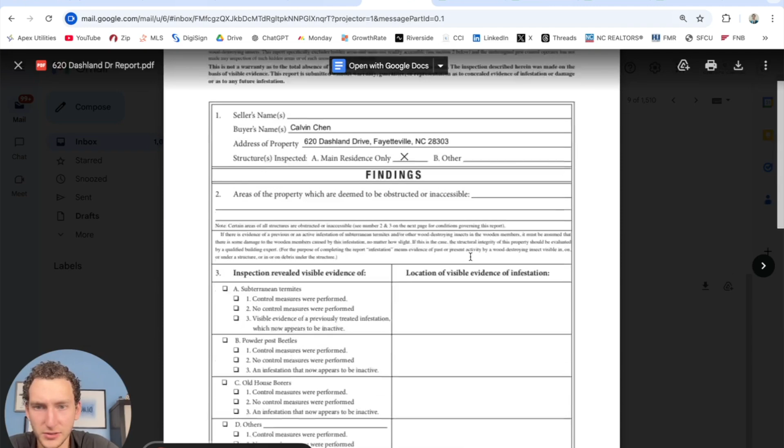Let's switch over to the inspection reports. So report ready, in Fayetteville, North Carolina area, I like to use Silk Inspections. John Fordenberg, if I'm saying the last name right, but John is great. His team, sometimes we work with Drew as well. But let's go one by one.

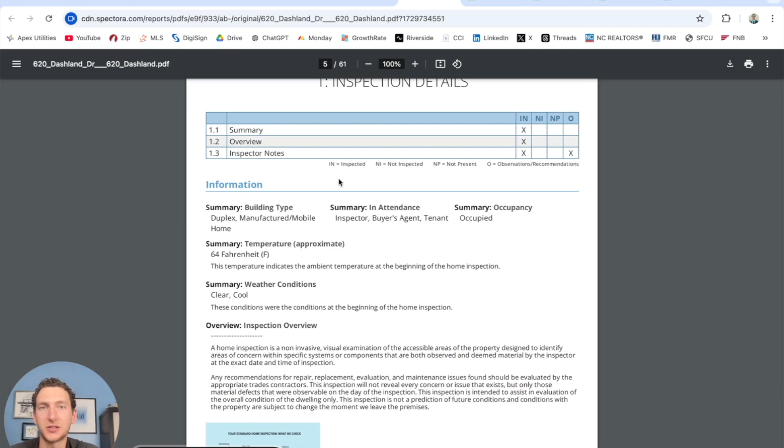So this is 620, one of the duplexes. All right, so inspectors are meant to find everything possible and inspect everything. You would hope that they would. Now, what our job is as investors, brokers, buyers, is to go through and see what's actually concerning. What do we need to get fixed? What is maybe just normal wear and tear? What is concerning and needs to be negotiable?

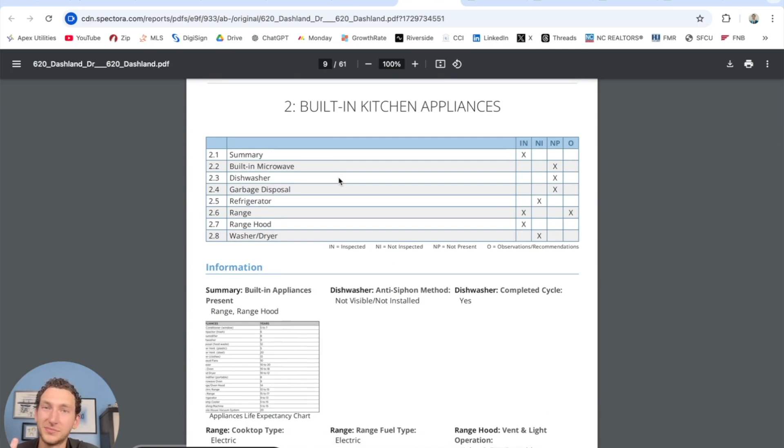So this tenant right here in Unit A wasn't home, wasn't letting anyone in. Could be for a host of reasons - at work, out of town, maybe they're moving out, maybe they're getting evicted, and the property management was just not really wanting us to know that necessarily. It's tough. That's real estate. You just got to go for it.

So let's go through here. I'll try not to talk too much. Anti-tip device, that's so this doesn't tip forward. Doesn't - I mean, it matters, but it's just a small safety hazard.

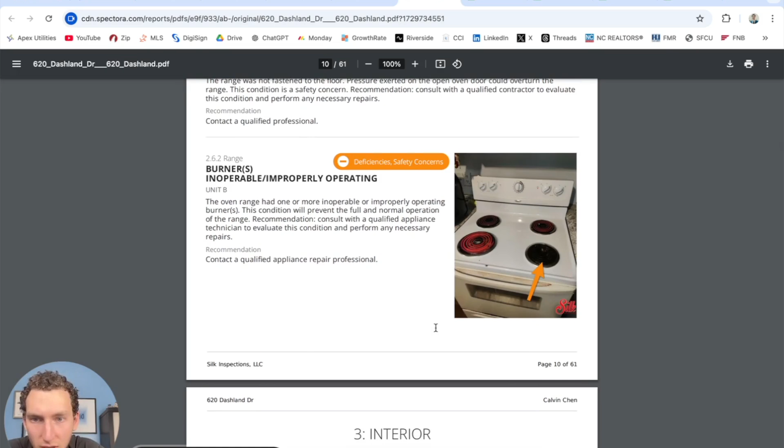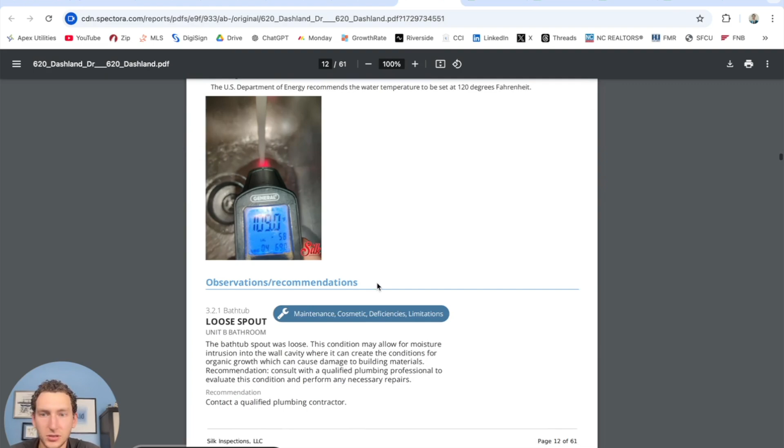So this looks like the burners are not turning on. These are very low cost repairs to make, so not a big deal necessarily. Water temperature - he had nothing on there. This spout is concerning because if it breaks off, it can cause a huge leak uncontrollably. So that'll need to get fixed for sure.

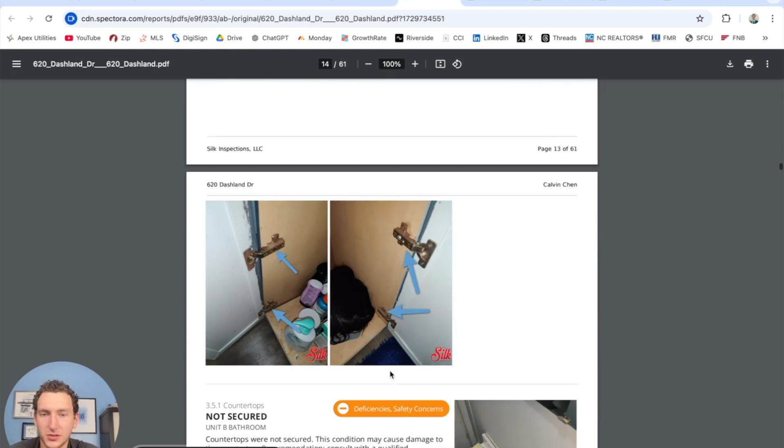Inoperable exhaust fan, we'll want that to get replaced. Cabinet hinges also, so there's no damage. The countertop needs to get secured. So these are all mostly small things so far, but certainly important.

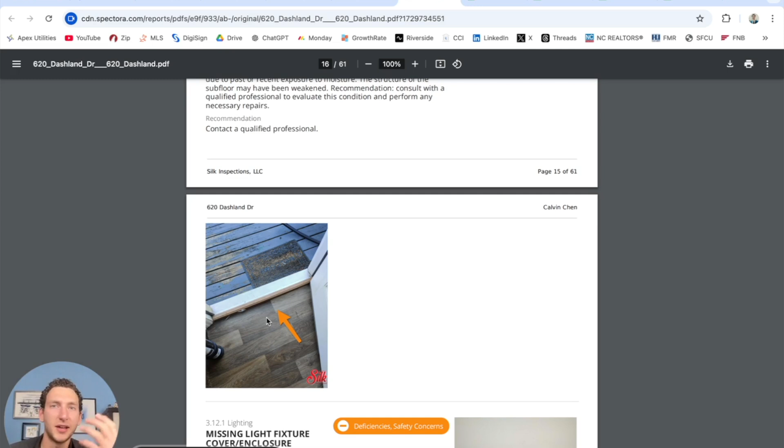Nail pops in the ceilings, loose doorknobs. And this is actually more concerning, is that there's a soft spot, and that soft spot's right by the front door. That could be - thankfully, it doesn't seem like it's from termites or anything, but it does seem as if maybe there's a bad seal at this front door and water has intruded and then softened out the bottom of the subfloor. So that's a concern for two things: need to fix a subfloor, get that soft spot fixed, and second, seal up the door properly.

When I was there, the inspector pointed out there's no gutters, so that water is just coming down, and if it doesn't have any diversion with the gutters, this type of thing is going to happen.

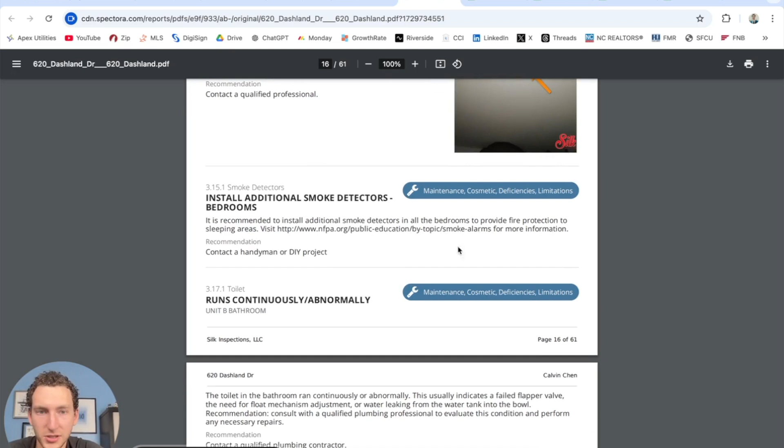I looked in this closet because I walked this unit specifically, and there's no light fixture. There was no switch either, so it was just a pull down. This isn't necessarily the hardest thing, but having it be exposed is a risk, especially as a landlord. Need to install smoke detectors, so that's important - those are required.

Toilet in the bathroom. Maybe it has a failed flapper valve. Need to fix that.

Inoperable, painted shut. I wanted to replace these windows anyway, a few of them.

If you can see the humidity here, organic growth. Yeah, I saw this one too. We don't know if that's mold or not, and the contractor can't specifically say. The inspector cannot specifically say because he's not a mold specific inspector, but he can say organic growth, and usually that means mold. I didn't like this at all to see that.

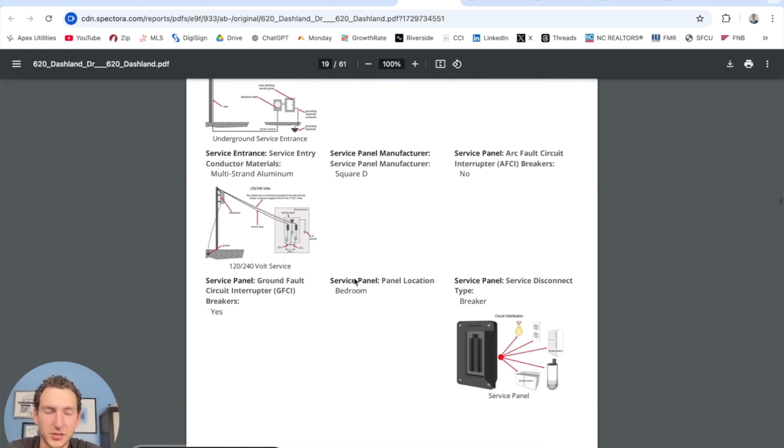It has a meter for each unit because there's unit A, unit B, as a duplex, which is good. It has GFCI protection. Good.

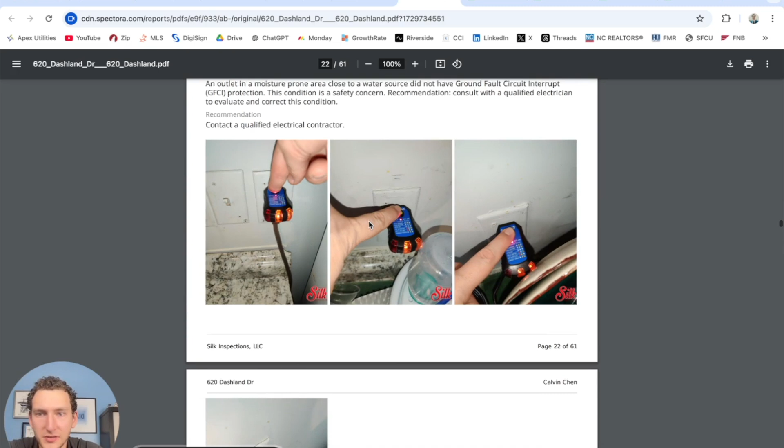Okay. The kitchen does not have GFCI protection though, so we'll need to get an electrician over there. This is not great either.

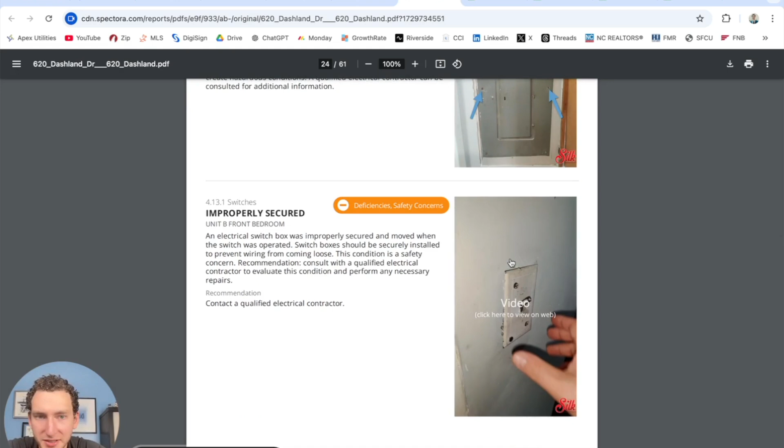So I saw these outlets and I really didn't like them. I think those should be replaced.

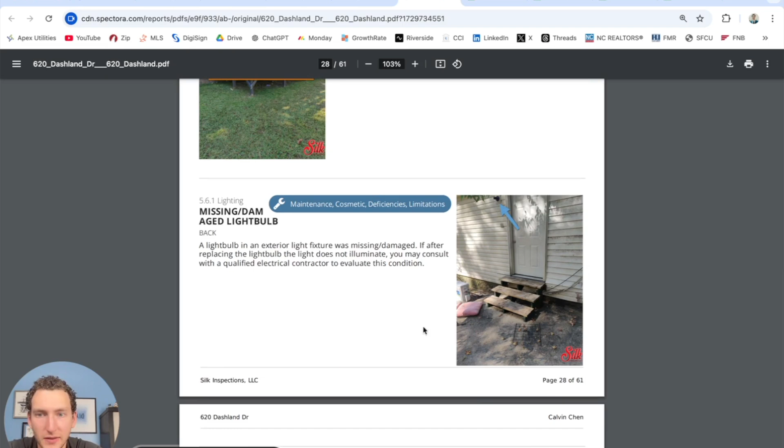Oh, this is on the deck. Yeah, don't like that deck. The back door doesn't have a light bulb. A whole bunch of things.

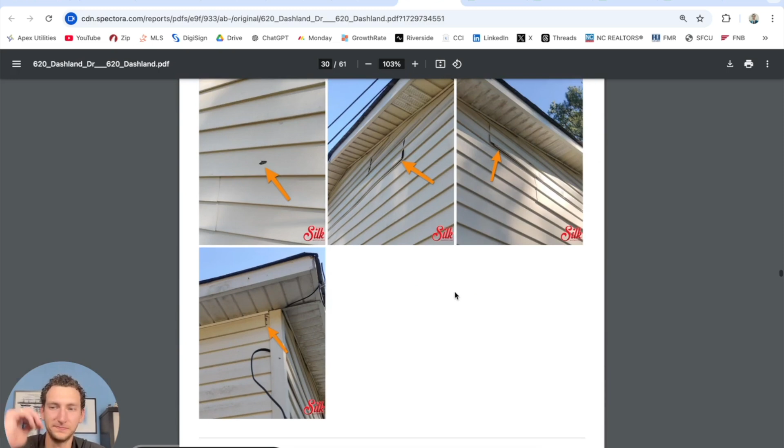Some siding damage. Yeah, a whole bunch of siding damage.

This is a tree that's pretty close. Can damage the foundation walls, so we'll want that cut down. Can also damage the roof.

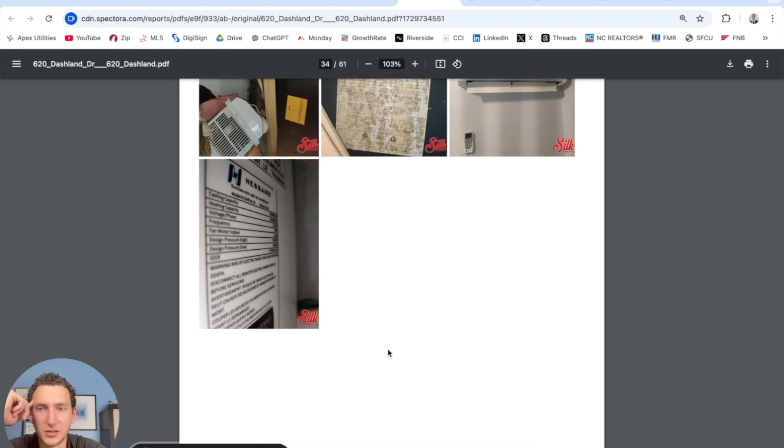Heating and cooling, let's see. All right, it's got a thermostat. Manufacturer's data plates present. So it has this mini split unit, which actually provides the heating and cooling. It doesn't have central air.

These are newer. But the central heating that was previously wired there was removed, probably because it didn't work. And to install these is about $2,500 each. Maybe even back when the owner installed them, it was less. Present day today, October 2024, it's about 2,500 to 3,000.

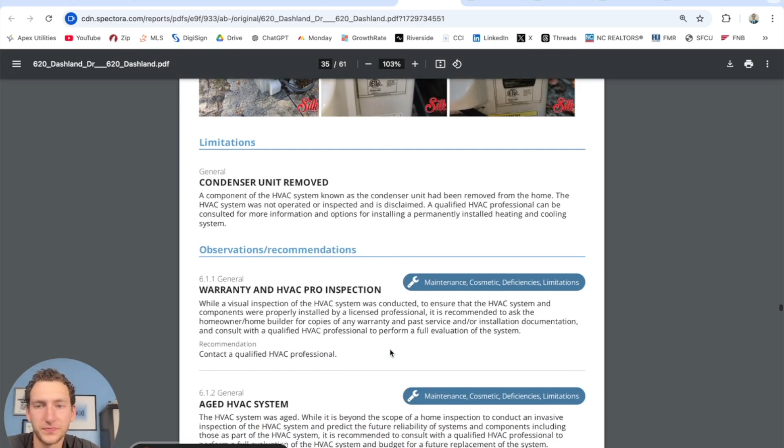And if you do a whole unit for each side of central heating, because you need one for A, one for B, you can't keep them the same, that's like minimum 7,000 each, probably more. Lack of refrigerant. This is a concern because we need heat, especially going into wintertime. That's a non-negotiable. Well, we'll negotiate it probably, but as far as providing that for the tenants, non-negotiable.

I think the roof's fine. Just has some vegetation. They always note that, and that's the tree that we saw.

Okay, no gutters. Exposed nails. No caulking.

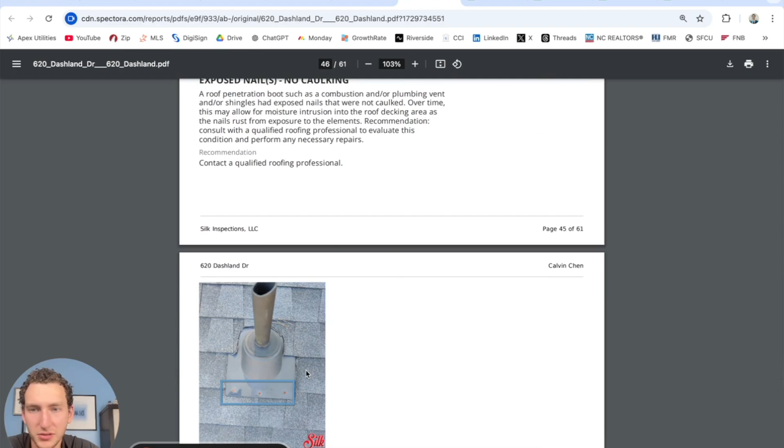Yeah, the vapor barrier is important. The dryer vent tube going straight into the crawl space, that's a no-go. It's going to cause all sorts of humidity issues.

There's some organic growth throughout due to the moisture. Staining, recent exposure to moisture. Let's see what this is.

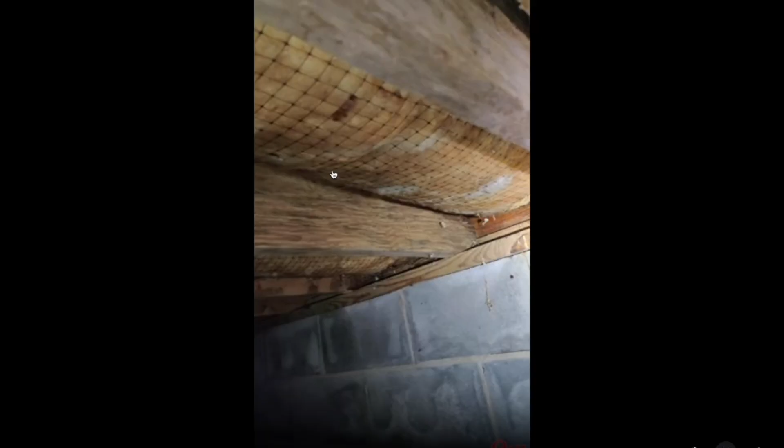Well, just seeing that, honestly, that's probably from where the outside had some missing, the fascia was open. Rain probably got in there, comes straight down the wall, and then hits this.

Conditions because it's so high in moisture. But once you put that vapor barrier, fix the fascia outside where it's exposed, those things should get fixed.

Hairline crack. Okay, the thing about this is, unless it's a quarter inch or wider, it's not necessarily the biggest issue. The tree roots causing cracks is not a surprise.

And yeah, I mean, there we are. That's exactly so. That's not fun to see. This is: take out the tree, prevent any further cracking.

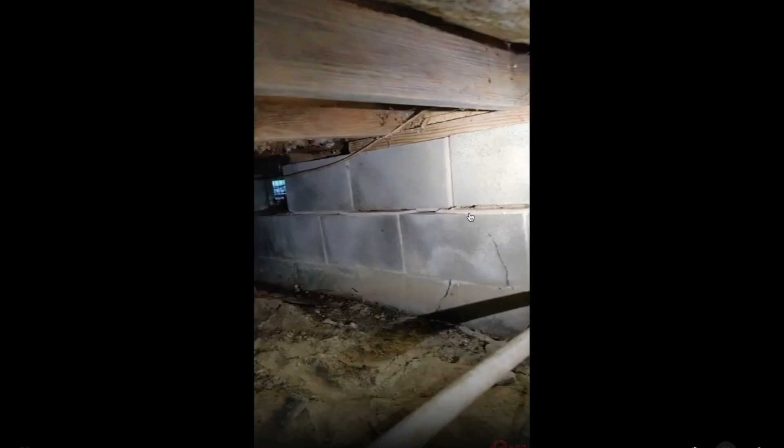Has some missing fiberglass. You know, we have to cap that because snakes can get in there, things can get in there and plug the lines. Dirt, leaves.

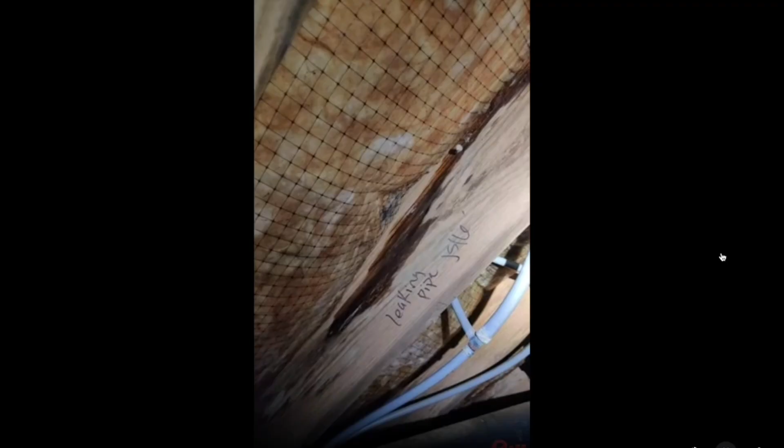This is the hot water heater, and it's closed up. Let's see this leaking water supply line.

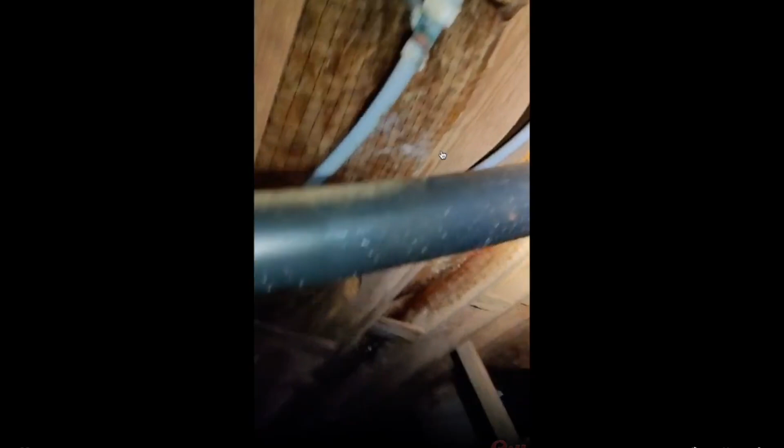It has polybutylene piping, which is not fun. This stuff was banned, I think, in 1990 and or '93, something like that. And it's because over time it breaks down.

So this is the inspector under the crawl space. Yeah, polybutylene, it's crap. Sometimes it'll last a long time, sometimes it gives out. But that was 620.

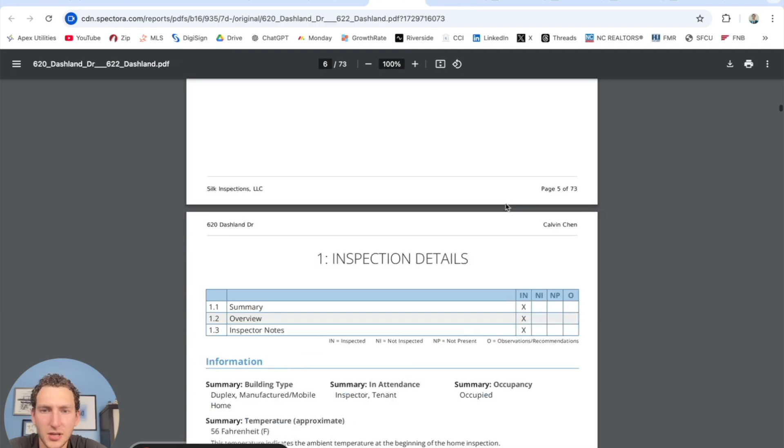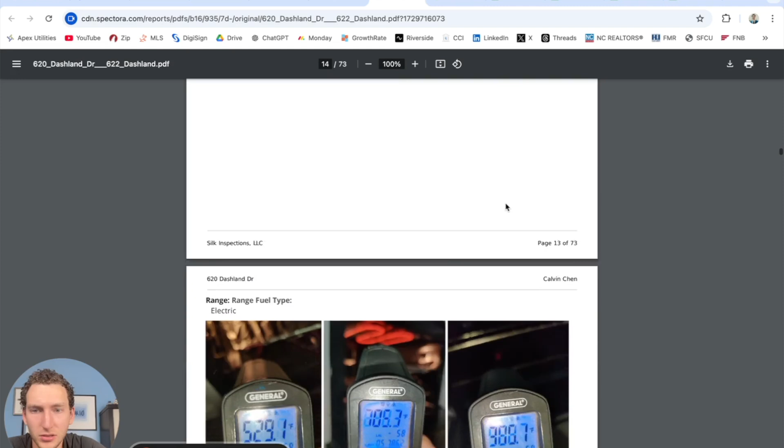Let's go over to 622, and we'll see how much... nothing is so concerning right now so far. I think all of these things are easy fixes and not too costly. There's certainly things we can take to the sellers and negotiate with. Unless they're not willing to negotiate, it might be worth backing out, but so far I don't think it's worth it to back out. I'll go a little quicker on this one.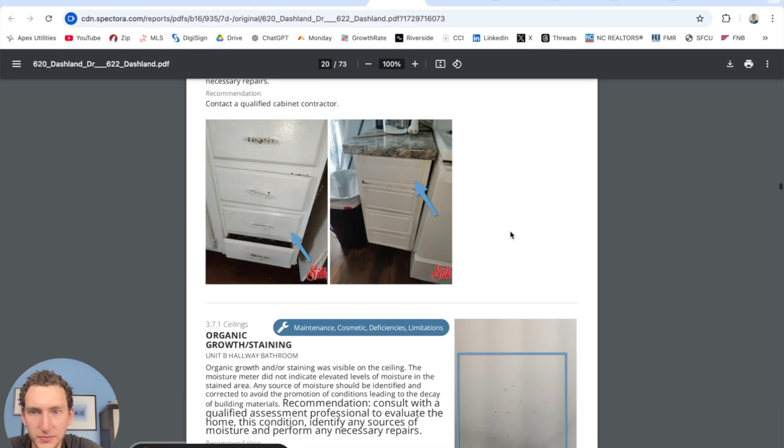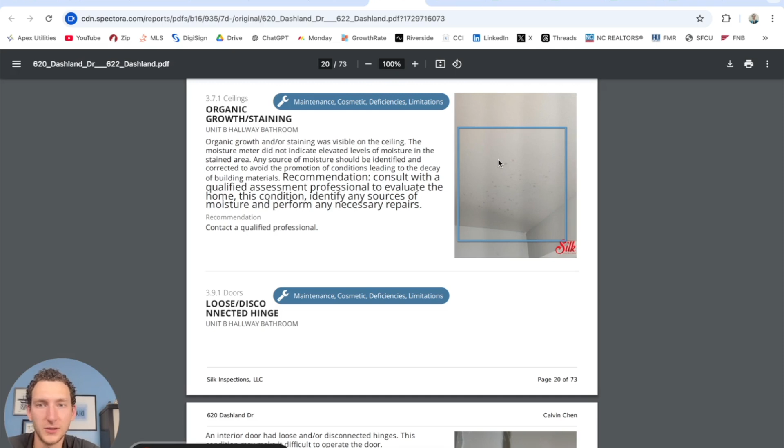The bathroom tub, okay, no exhaust fan for the shower. That can be installed. This one can be replaced, these drawers. Okay, I don't like this, but that can also be dealt with. This is potential mold spores, organic growth staining. So what we could do here is spray Kilz, which is a primer that also kills some mold spores, and paint over it, as long as we have the moisture problem taken care of. Otherwise, the moisture problem is something that will make that continue - that's the root of the problem.

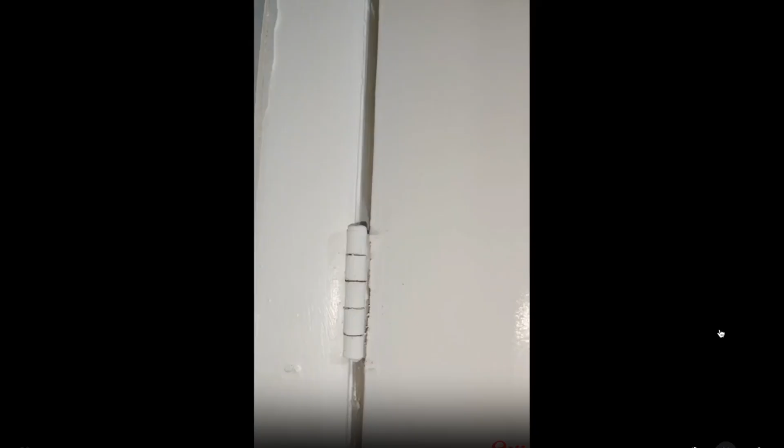Let's see, this one is, of course, we go back here. All right, here's the video we were trying to watch. Oof, okay, glad you found this.

It's a little sticky because the hinge is loose, but we can fix that hinge. Doors, more gaps, uneven sloping floors - that's a concern.

What is that? Floor covering material - hardwood laminate installed in a moisture prone area. Well, sometimes these are waterproof. I put these in my wet areas, kitchen and bathrooms, because they click in and they can be waterproof.

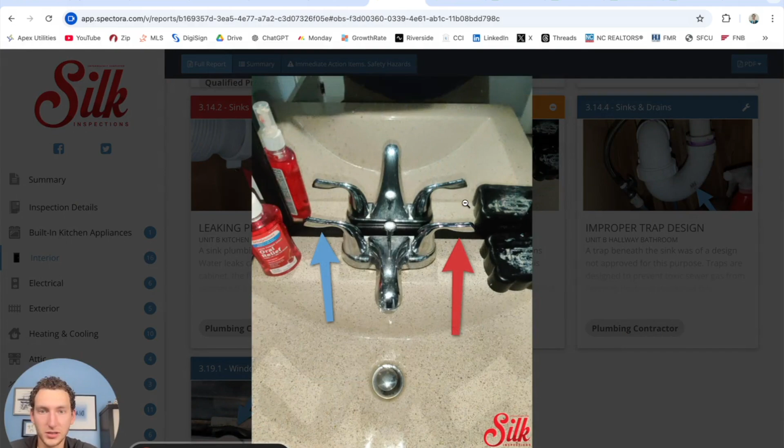The light didn't respond - could be that the light bulb's out, could be something else. Loose faucet, all right, we'll tighten that up, not a huge deal. Leaking plumbing assembly - that is not good, that needs to get fixed. And this vanity or whatnot probably needs to get replaced with how that looks. Hot cold reversed - we can swap that.

Improper trap design - yeah, that's not the right P trap, that's just an elbow pipe basically, but that's not a P trap. And the reason you need a P trap is because sometimes then the water can come back. The sewer - it helps keep the gases and the dirty water out versus allowing it to come back.

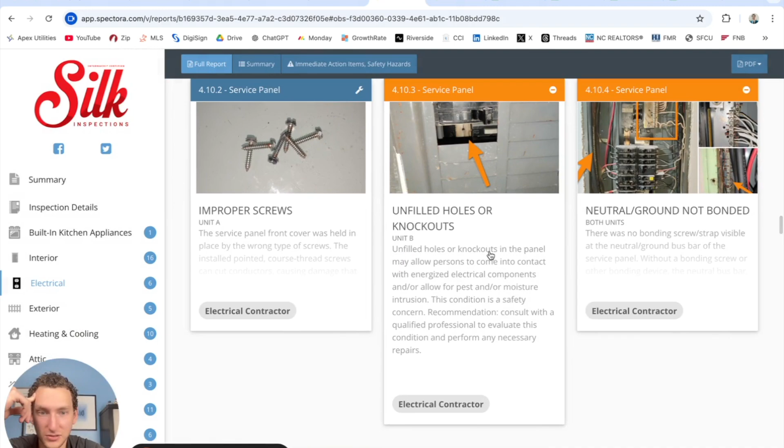That's not locking up, it's not sitting flush. No GFCI protection, missing, incomplete. Improper screws - just took them off and took pictures. Electrical, neutral ground not bonded. We're going to get an electrician out, we're going to get a plumber out.

Doors, condensation stains on the windows - oh, on the door. Get that fixed, yeah, that's the back door, need that fixed.

I mean, these things are... yeah, this is terrible. They put a window, and instead of getting the right size window, what they did was just put plywood instead. That's just so ridiculous, so ridiculous what you see on some of these properties. They have window units - says no permanent heating, cooling because the central line was removed.

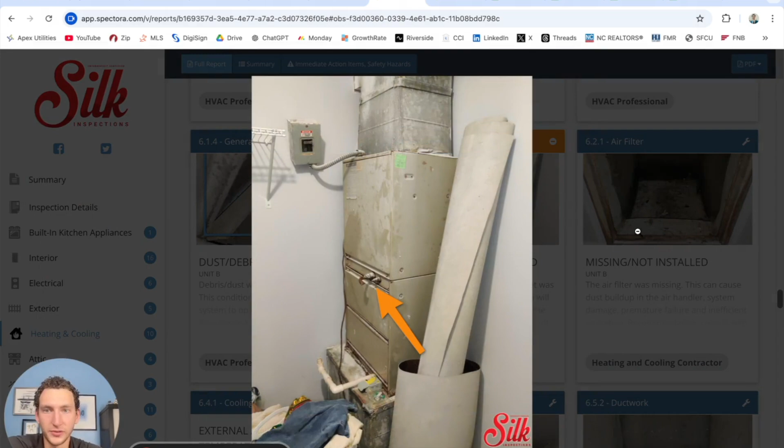Does it have... I think this one also has the mini splits. But anyways, again, the attic ventilation insufficient, causing some organic growth. No firewall between units.

All right, let's check out the roof. Debris, exposed, no gutters, same thing. This one also has no vapor barrier. This is inappropriate too, it needs to be a vent - they did this, that's the cheap way. Debris throughout the crawl space, more organic growth because of the humidity.

Temporary support post - this also needs to get fixed from a foundation contractor. Look at that, it's bending. It has the jacks right here, which sometimes are all right long term, but it's rusted, so it's not totally okay. It needs to be in conjunction with the permanent support.

That's ridiculous, a cracked joist. Wow, that's really low hanging. We can fix that, that's just not good - that's cracked. Joists hold up the floors, so when the joists break and the subfloor rots out or whatever, that is when you can just fall through the floor. It really does happen. Can I make this bigger?

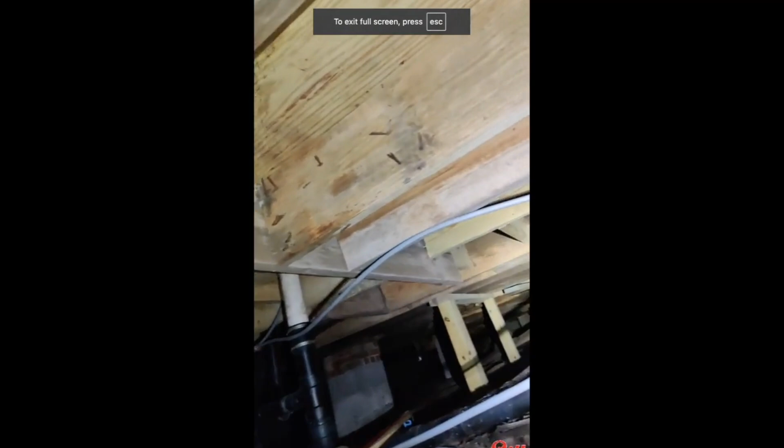Sheesh, we got some wood rot decay. Yeah, it has some floor renovations, but doesn't seem like it was done very well.

We're almost done here. This one again, we'll fill that with some mortar so it can stop. When water gets in it, like in science, that's how cracks form and rocks start splitting, because water just continually goes in it when it rains and things like that. So we fill that and it should stop going apart, as long as we address the other things as well that are causing it - plumbing, a leaking drain pipe.

That's not good, another clean out. And that's just like a $3 cap, but it's really important. Low hot water temperature - hot water heater is not accessible.

Another active leak, and this isn't from PVC, this is from polybutylene, and it's caused a lot of damage in here. That's gross - that is from polybutylene. That's gray. Oh, look at all that. That's mold, we can call it mold - probably because that's what it looks like.

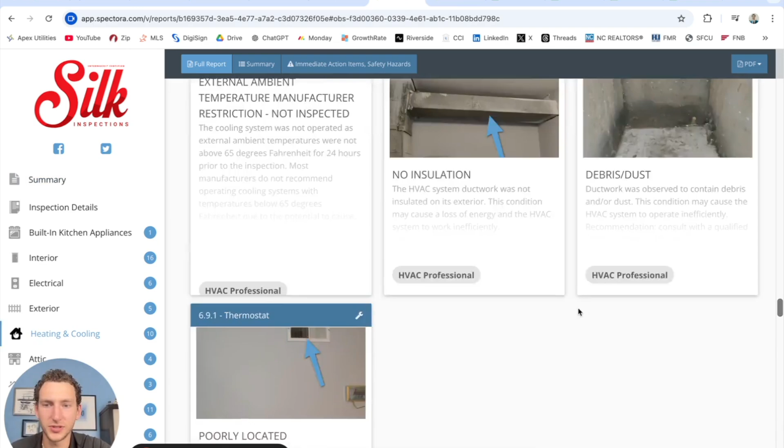And that's the end of that. So we're gonna get a plumber, we're gonna get an electrician. Nothing too concerning - floor joists.

Now these things are concerning, but if the sellers don't want to negotiate, then that can be fine. What we'll do then is probably not continue with this project.

But the next steps - first step is get inspections, second step is get quotes, third step is negotiate with sellers, fourth step is...

Complete negotiations. Make sure we want to continue through due diligence, which is the period that you have to negotiate additionally and pull out of the contract for any reason, and only lose your due diligence deposit. If you've also put earnest money, then you want to back out before the due diligence period ends, which on this property is 21 days.